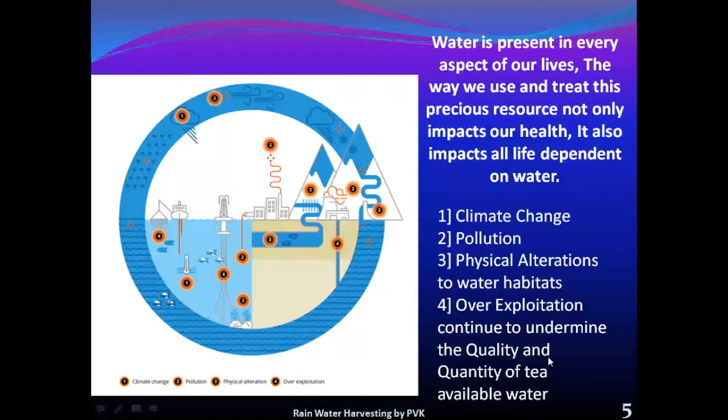This brings us to the water footprint concept. So what is a water footprint? There are different types of water footprints. First is the blue water footprint, used to produce products; this includes water that evaporates from these sources also. We have to understand what the blue water footprint is.

Similarly important is the green water footprint. This is the water from rainwater stored in the soil. We need to understand how much rainwater is available, how much is evaporated, and how we can utilize that. This creates the green water footprint.

Another is the gray water footprint. Gray water refers to polluted water. It refers to the volume of water required to dilute or remove pollutants to acceptable levels according to prescribed norms. When we use and contaminate water, it gets converted into gray water. We have to understand what our gray water footprint is also.

So when we talk about the water footprint, we have to look towards all three areas. Out of these, the green water footprint is now...

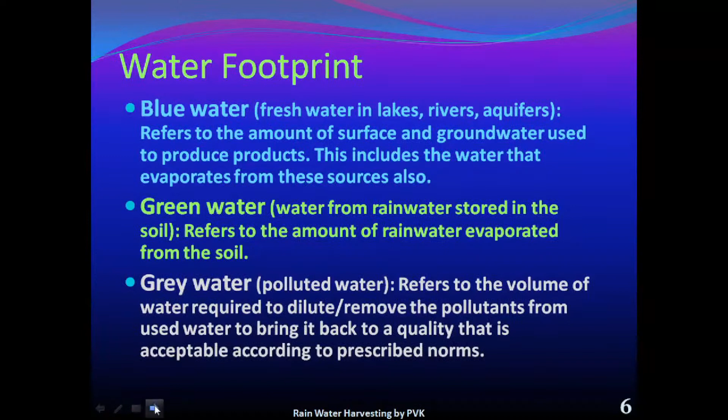As far as India is concerned, the water footprint assessment of India shows that with a population of 1050 million people, our water footprint requirement is 1,100,000 million cubic meters per year. This means a per capita footprint of 3000 liters per day. Remember this is the total water footprint of the Indian people - for one person living in India, we require 3000 liters per day of water, including all physical and other activities. All these three water footprints are covered into this.

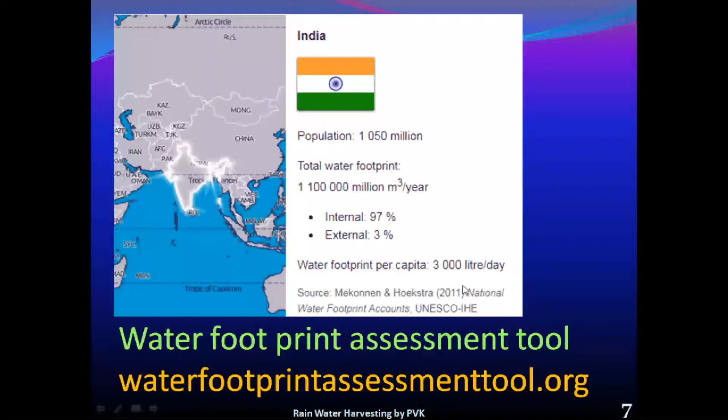One must think about how we can make water available. If you understand the amount of water available on earth, 97.5% of the water is available in the sea, and the remaining 2.5% is available as fresh water. This fresh water, only 2.5%, is what we can use for human consumption.

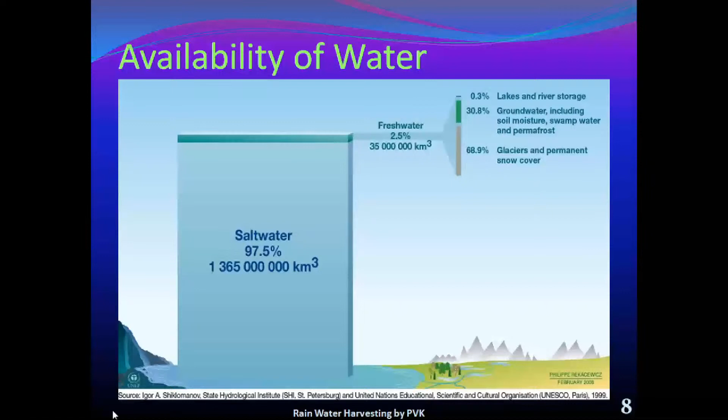Out of this fresh water, we must understand that 70% of the water is present in the ice caps, in the form of polar ice caps. So out of that 2.5%, about 70% is the ice cap.

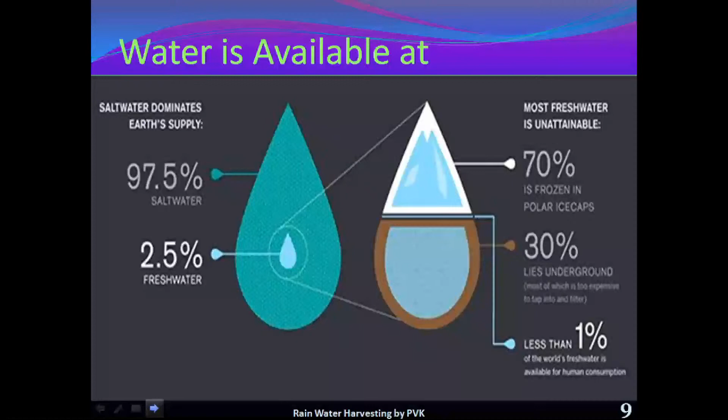30% of water lies underground, and only less than 1% water is available on the surface. Think about the availability of the surface water. Out of this 1% of available surface fresh water, 38% is available in the moisture form in the soil, and 8% is available in the form of moisture in the air.

1% is available in animals and plants, and 1% is available in the river. Remember, this is only a part of this 1%. So out of this 1% of fresh water available on the surface, only 1% is available in the river.

As you know, most of the rivers in India are not perennial now. Out of that, 52% is available in lakes and ponds, where we have constructed dams, and that we are utilizing as fresh water. So if we consider all these counts, total fresh water available on earth, out of that only...

0.007% of the potable drinking water is available. Looking at this factor, one must understand that a very precious element available on earth is water.

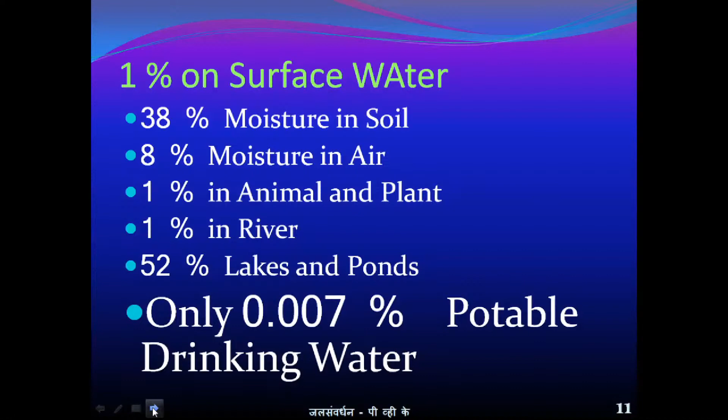So there are various sources of water, as we already know, that we can take water from the river and the lake. We have a municipal water supply at our homes. Then in the rainy season, we get water from the rain.

But all these three sources are limited: rain is only in the rainy season, municipal water is only a restricted supply, and river water is also a limited resource.

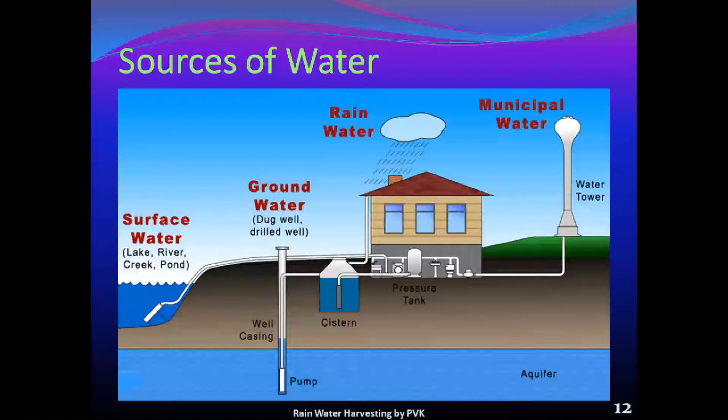So what we are doing now is digging bore wells in the earth, and by pumping from the ground aquifer, we are making groundwater available for our various needs. This activity, in the last 10 years, we have not controlled.

So here one important sentence I want to highlight, which is given by the vice chairman of the World Economic Forum, is that all over the world the economy was getting slowed down, our industries were getting stopped, and now it is everybody's responsibility that we should work extra, work hard, and ensure that we bring our Indian economy again in force.

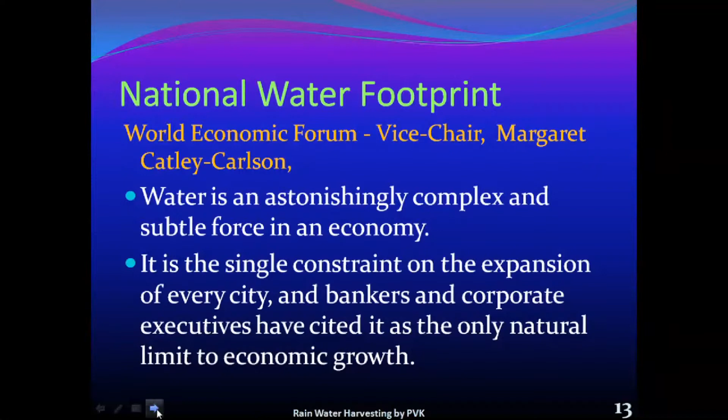And to ensure that, we must understand that you may be thinking we will manufacture or do agriculture, but for all this activity we have to ensure there is availability of water. Only then can we bring energy into our economic system.

So this water is an invisible constraint to the economy that we have to understand.

Therefore, to satisfy the water needs of the construction industry, the water needs of human life, and the water needed for animals and plants, and also importantly to produce food required for all human beings, the water available should be abundant for flourishing agricultural activities.

And for all this we have to ensure there is ample water available. Otherwise, all development in these areas will get restricted. You cannot take agriculture further, we cannot advance human life further, we cannot do more manufacturing, and we cannot have a good construction industry revolution.

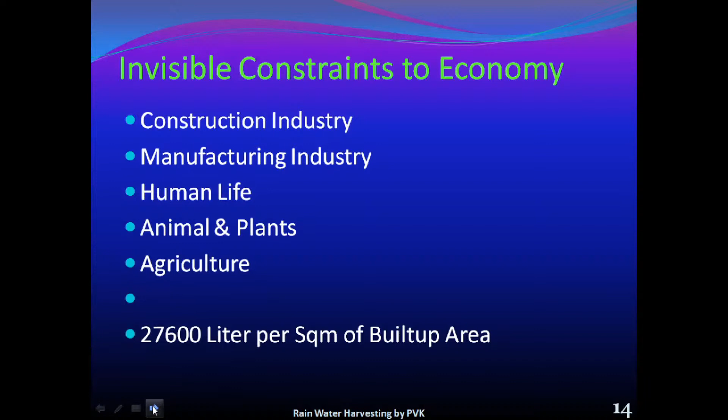So for that purpose, we have to understand that the quantity and quality of water should be sufficiently available for all these activities, and only then can we make our life sustainable.

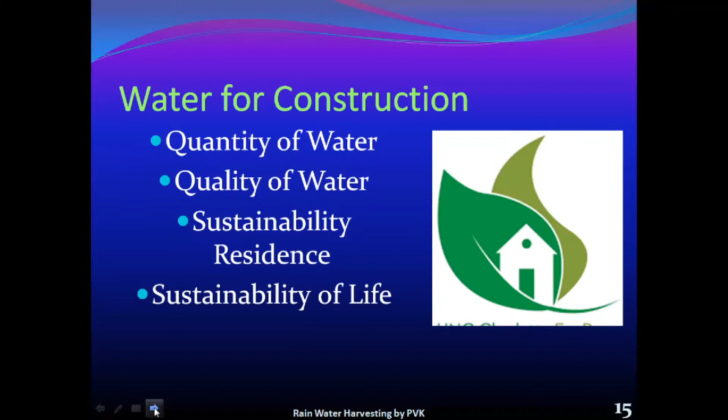So to make sustainable residence and sustainability of life, we have to focus on the availability of water, meaning the quantity of water and the quality of water. Unless we focus on this, we cannot manage all our activities which require water.

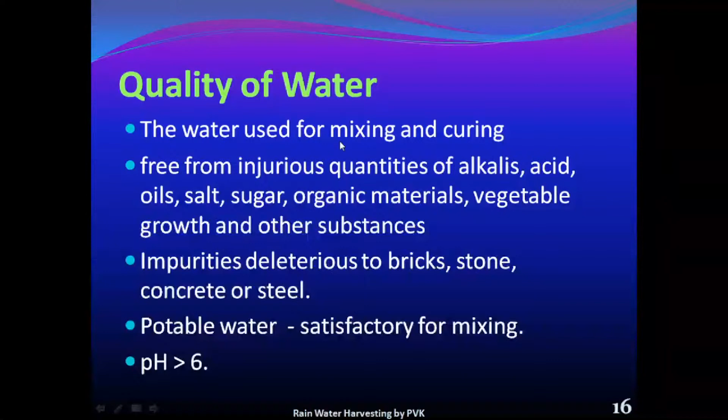From the last 2-3 years, in various parts of India we have been facing a water crisis, and the same is the situation across various countries. One city in South Africa was declared as 'Day Zero'.

So we have to understand that regarding water availability, 25% of people in the world don't have pure water. 40% of people don't have sufficient water; they are always in fear of water scarcity. Out of this, if you think about India, out of the total population of the world, 16% of the population lives in India.

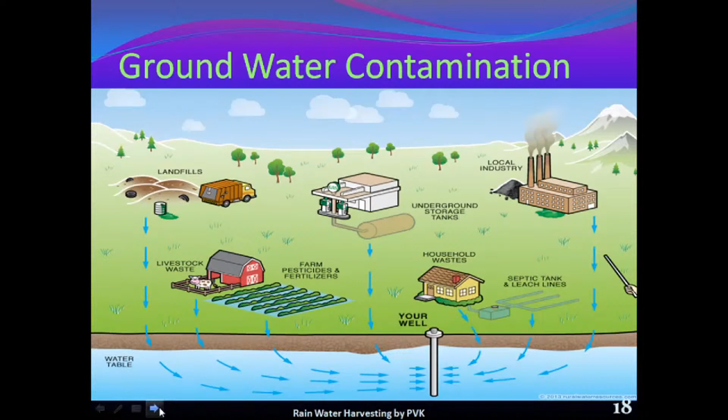So on the surface there is scarcity of water, and whatever water we get through rain percolates through the natural system, also getting contaminated, and is stored into shallow aquifers. But with these shallow aquifers, in the last 10 years we have extracted so much quantity of water from them.

From the last 10 years, people have gone to dig deep bore wells, because at a depth of 100 to 200 feet in the tube well, we are not getting sufficient groundwater. That is the real problem today - on the surface there's limited water, and when we think about groundwater storage from the last 10-20 years, whatever water was available in the shallow aquifer, we have sucked it out, and now shallow aquifers are very dry.

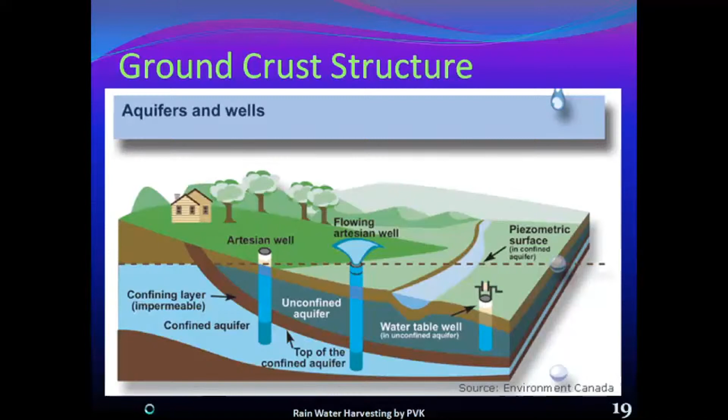With the advancement of technology, we are going deeper and deeper, trying to extract water from deep aquifers. And in the last 6-7 years, the condition has gotten much worse.

Earlier, whatever bore wells and tube wells were there, we were taking water from shallow aquifers. Every year when rain falls, this rainwater percolates and accumulates into these shallow aquifers. But because of this, we have gone into the deep aquifers, and now in the last 10 years, we have made the deep aquifers dry too.

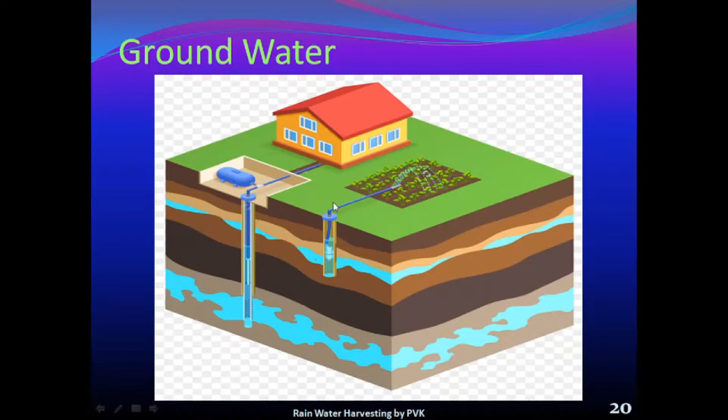Now the condition is there is no water in the shallow aquifer and no water in the deep aquifers either. When rain falls, because of paving blocks, the rate of percolation has decreased significantly. There's also a limited capacity for water to percolate deep into the ground, so water due to percolation only reaches the shallow aquifer, not the deep aquifer, and it takes 15 to 20 years to reach the deep aquifers. That is today's exact problem - we don't have water at the deep aquifers.

Every year our shallow aquifers get replenished with water, we take it out, and in the summer season we think we will get water from the deep aquifer - but from the deep aquifer too, we are now facing scarcity of water.

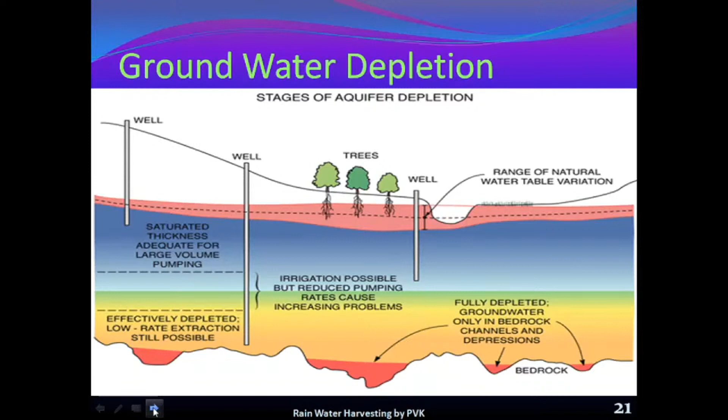To solve this, we have to think about what the solution is. Last year in India the condition was very bad, and because of that the India government started the Jal Shakti ministry.

They have given a 5-point agenda for this. First is water awareness program. Then tree plantation, which we do every season. Then protection of existing water resources, and recycling of grey water. And the last, most important and effective of all, is rainwater harvesting.

With all these, we cannot ensure sufficient water will be available for our future community. But rainwater harvesting is one of the most important and best solutions to make water available for our near future.

For the quality of groundwater available in our deep aquifers, one must go for modern methods of rainwater harvesting. Many people know there are various methods - water collected from the roof gets filtered and then stored in our tanks for use. These methods are known to us.

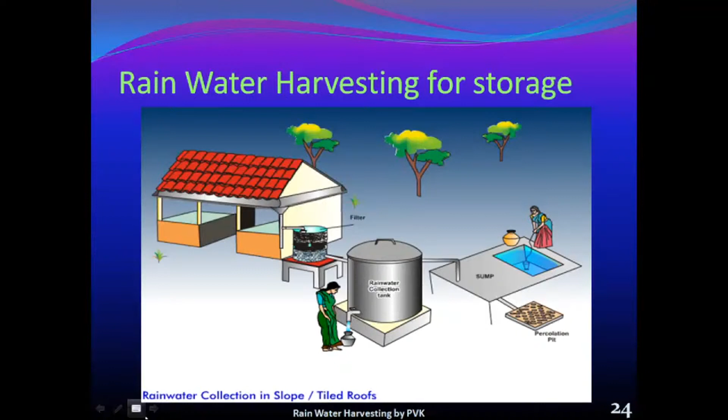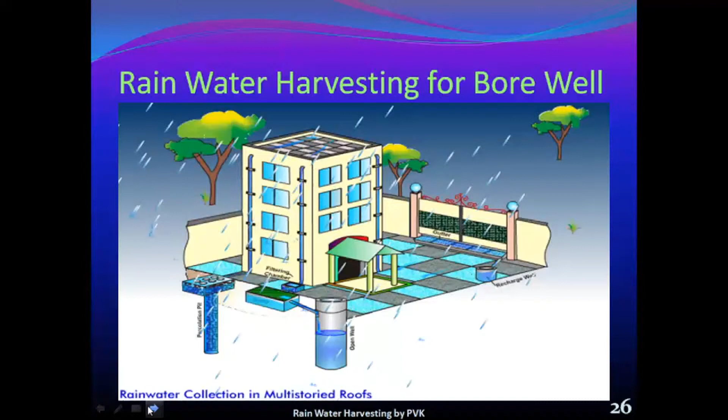We can also filter that water and collect it into a tank so we can use it for gardening and other purposes. We can also make the harvesting go to hand pumps.

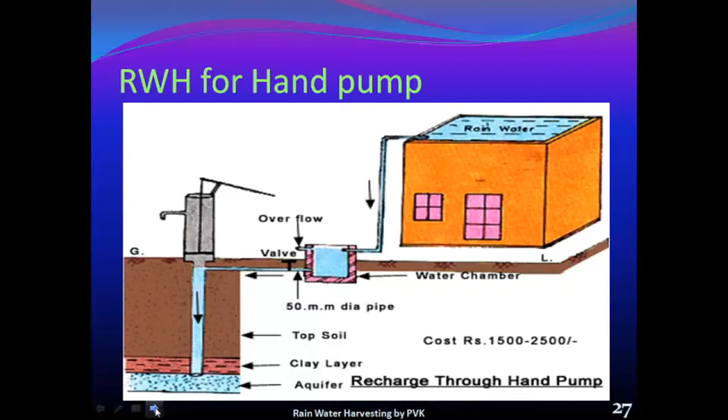But even though this information is available on the internet and various resources, people are not doing the correct procedure for rainwater harvesting. Whatever rainwater harvesting they are doing, there are some technical faults in it.

Therefore we have started this initiative to launch a program for schools and colleges where we highlight the total water conservation program - a 15-point program for schools and colleges.

We must understand exactly what this is. I know people are not exactly aware of the correct way of doing rainwater harvesting. There are some misconceptions - collecting rainwater before contamination and sending it to the open well or bore well after simple filtration, in view of improving the quality and quantity of groundwater, that is called rainwater harvesting.

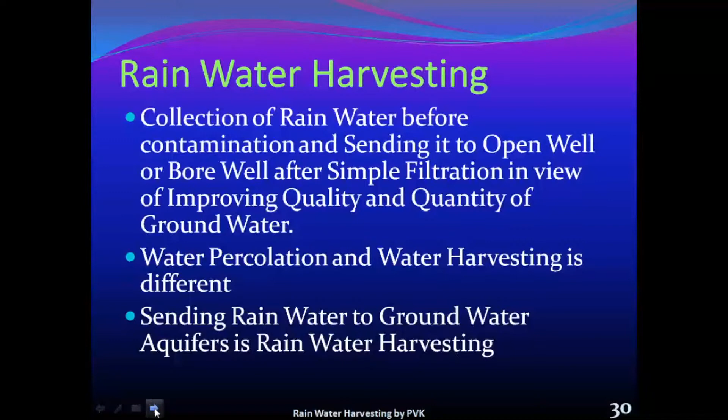To understand this, we will first look at the different elements of the rainwater harvesting system. The first element is providing a mesh at the rainwater pipe on the terrace, so that when rain falls on the terrace and water enters the pipe system, contaminants like leaves of trees and other debris should not enter the pipe system.

Then for rainwater harvesting, we have to provide a rainwater collection pipe system, which we must systematically design. All the rain pipes from the terrace should be connected to each other at the top level, and only one pipe should be taken down. That pipe connects to an inspection chamber for inspection purposes, where we provide a flush valve or diversion valve. In the next presentations you will understand how these valves are arranged and how the inspection chamber is located.

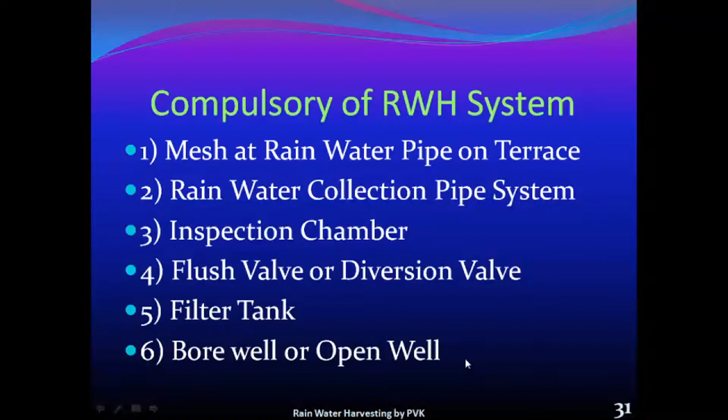Most importantly, we have to collect this rainwater and send it to the filter tank or filter element, and only after filtration should we send it to the bore well or open well, so that pure rainwater directly goes to the deep ground aquifer. Before doing all these activities, we have to understand the exact difference between water percolation and water harvesting.

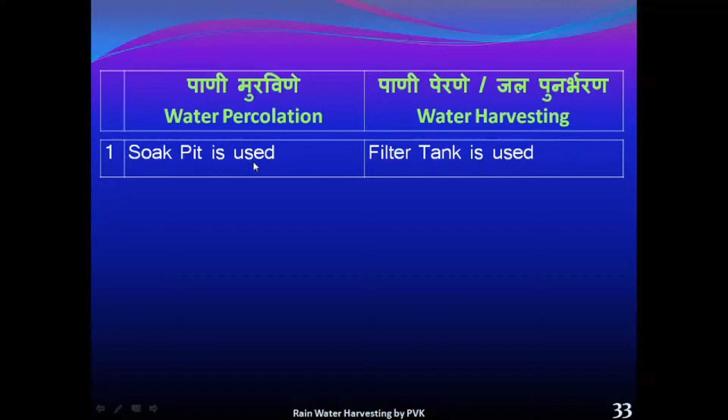So for water percolation, we use the soak pit, and for water harvesting, we use the filter tank. That difference we have to understand. In the next slide, I will show you the figures.

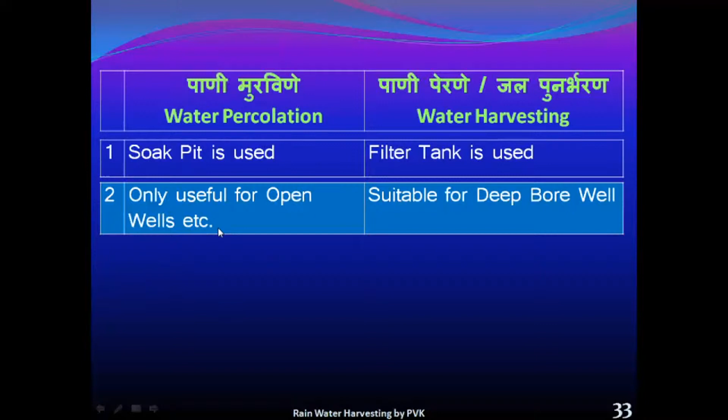This water percolation is useful for the open well only. When we dig and make the excavation, we place some stones into it and send the gray water into that. So that is water percolation exactly, and that water only goes to the well. But to take good quality water to the deep bore well, we have to carry out rainwater harvesting.

Water percolation is meant only for wastewater, gray water, or used water. All this wastewater can be sent to the soak pit. Through that, it gets percolated and goes into the groundwater sources somehow. But in rainwater harvesting, pure rainwater is directly sent to the deep ground aquifers. That is another difference. In water percolation, water percolates to the nearby soil mass only, so it is only useful to the nearby trees and plants.

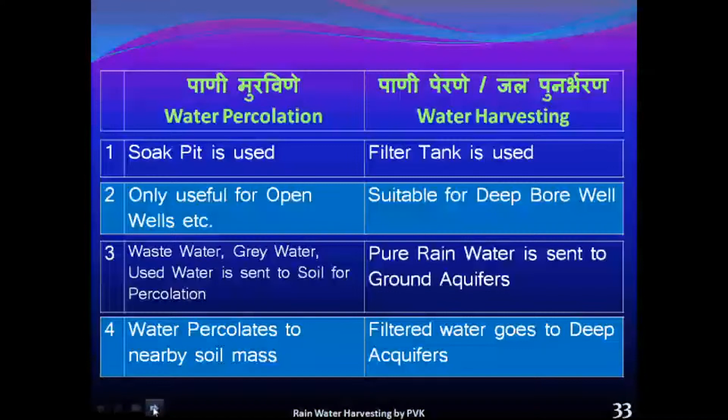But when we do harvesting, the filtered water goes deep to the aquifer, where it gets stored for a long time, and its quality remains good. Therefore we have to understand that water harvesting is more important than water percolation. In water percolation, the water gets absorbed beside the soil mass and the plants only, but here it goes to the deep aquifer.

This percolation of water goes only 30 feet down into the earth. When water is percolated through any percolation pit, it goes down below to 30 feet. But in the summer season, the ground gets hotter, so that water comes out again and evaporates, and the ground surface becomes dry again.

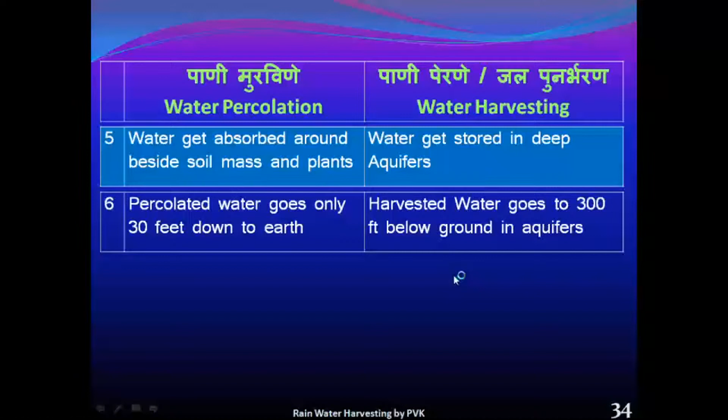But when we send pure rainwater, it goes deep down up to 300 feet below, and we can store it for a long time. Therefore the capacity of absorption and the role of percolation reduces over time. This is only a short term solution, that is water percolation. But rainwater harvesting is the long term solution, where we can ensure the availability of good quality water for a long time.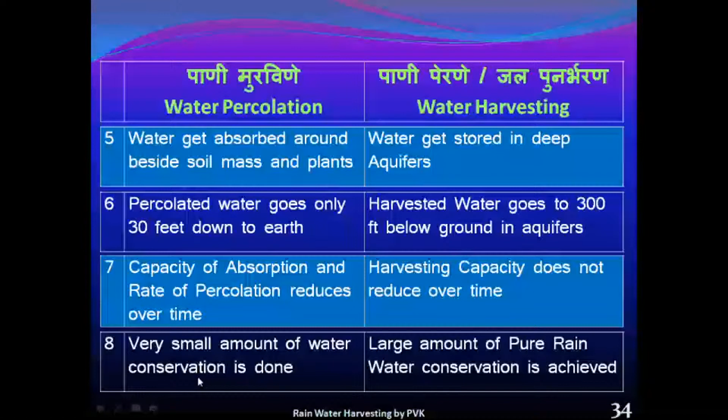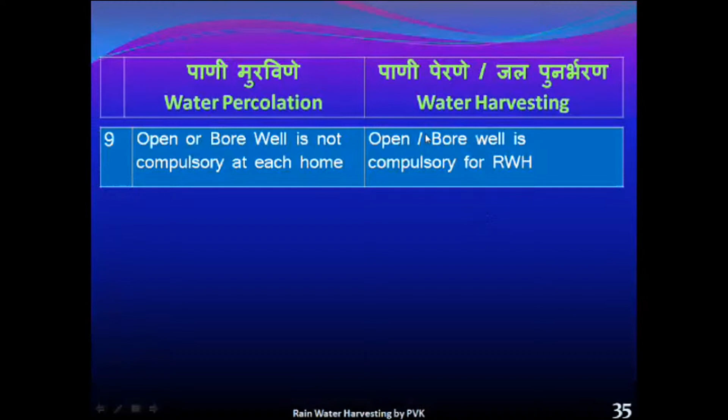With water percolation, only a very small amount of water conservation can be made. But if you want to conserve water properly, when we talk about percolation, that water may be available, but if you require water in deep bore wells, one must go for water harvesting.

The cost of this soak pit or percolation pit is around 3000 to 4000, but very little water is conserved compared to its potential. In case of rainwater harvesting, the cost is only 4000 to 9000 for a 1 BHK or 2 BHK building, but here a good quantity and quality of water gets conserved. So the water conservation potential of rainwater harvesting is very high, and it is very low cost compared to the cost per liter of water.

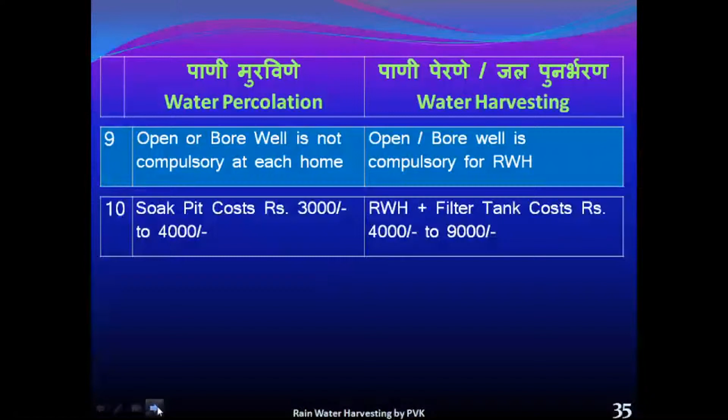In water percolation, once we carry out the percolation pit, no maintenance is required, but it is a very short term solution. In case of rainwater harvesting with a filter tank, it requires around 500 rupees per year in maintenance cost. That is one important thing we have to remember.

The percolation water from the soak pit may contaminate the water in the open well, we have to remember that. If the percolated water gets contaminated, that contaminated water comes into the open well, and the open well water also gets contaminated. But that is not the case with harvested water. The quality of the groundwater also improves, and that is the most important advantage of water harvesting.

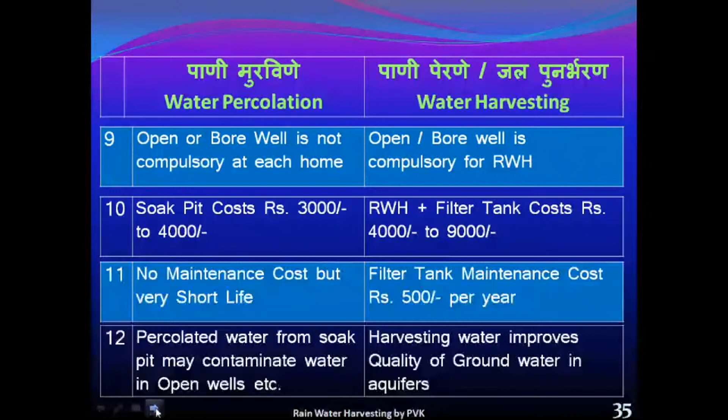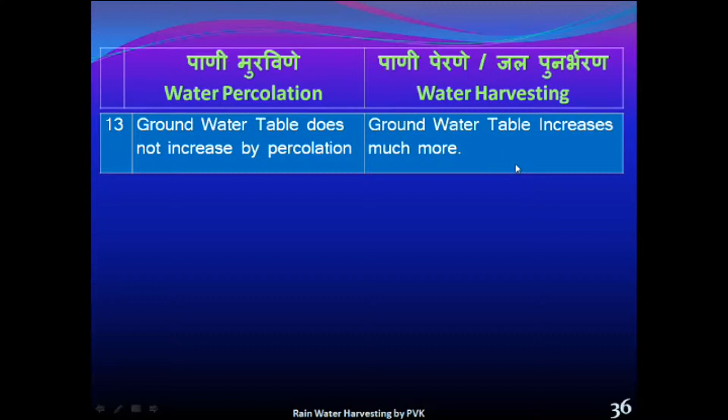So for the groundwater, water percolation is not the solution. The correct solution for ensuring the groundwater table and sufficient water availability in the ground table is only rainwater harvesting. Therefore, we have to remember that the soak pit or percolation pit is only used for wastewater recycling.

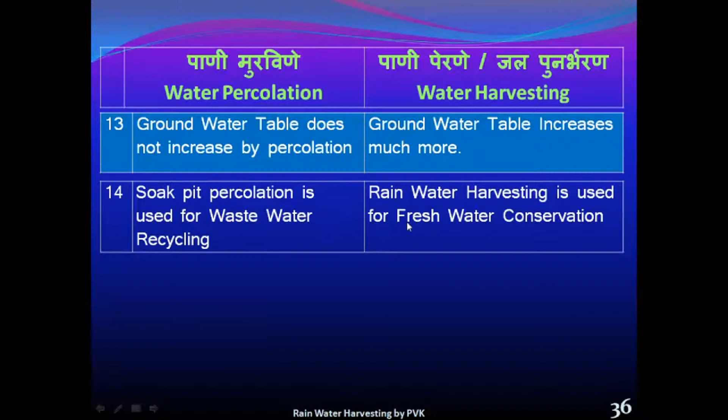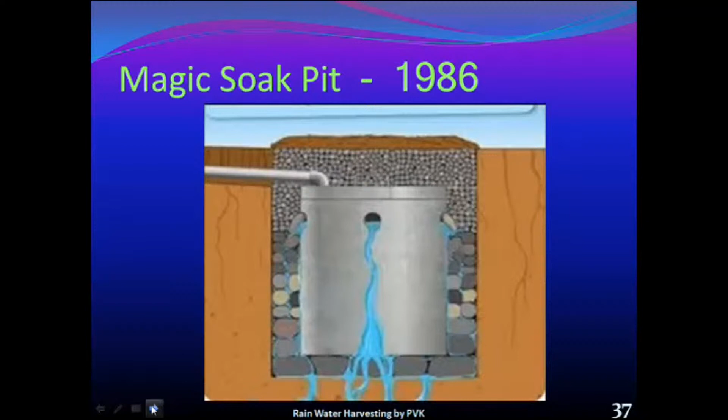Water is in the deep aquifer. That is our exact problem, because most people are dependent on the groundwater available in the aquifer, and they are taking that water through the deep aquifers.

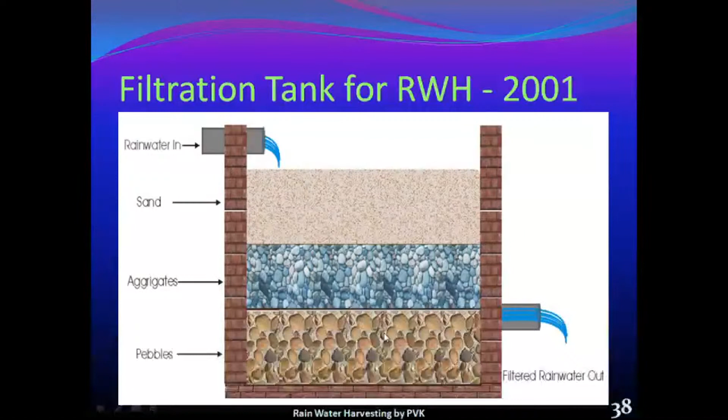This was the situation when we were constructing this type of filter tank in 2001. Even now, the university has constructed this type of filter tank. This is the top view where you can observe the sand, and onto that the water coming from the terrace.

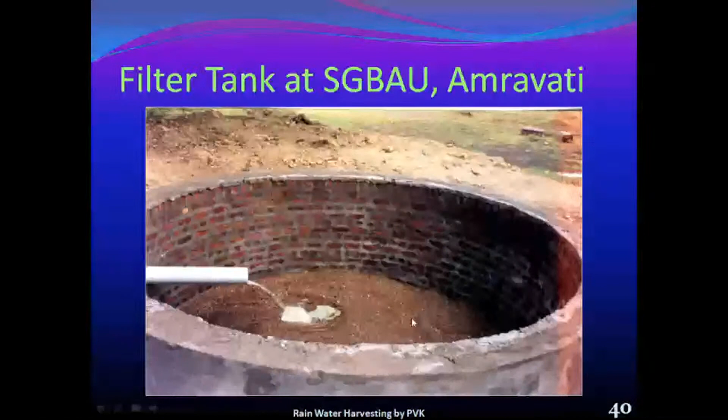These are some of the pictures. This is the bore well casing, and around that we are constructing the filter tank with sand on top, but people were throwing garbage into this tank. So we found a solution and placed this type of mesh on top, so that the sand stays safer and people cannot throw waste into the tank.

But every year this tank requires maintenance. We have to remove the top sand because it gets contaminated with soil, and then we have to refresh it and pour it again. So this type of filter tank requires maintenance.

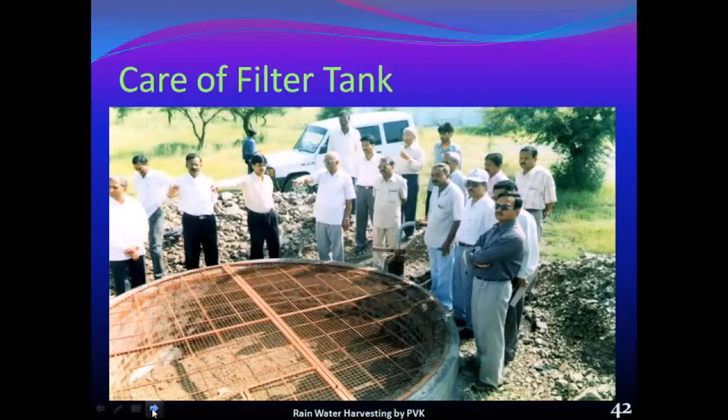When we construct this type of system, we provide a pipe connecting to the well, and that water comes into the well. But over time, as we try to percolate the water, we made a mistake, and the whole purpose of rainwater harvesting got stopped.

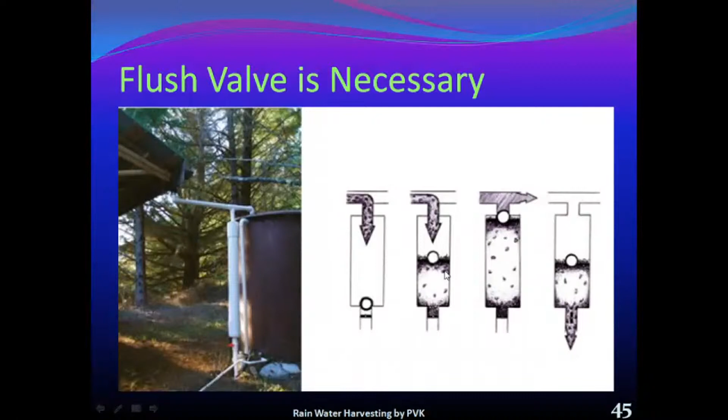Now today we have to understand that to make available a good quantity of fresh water, we have to ensure that we do rainwater harvesting in a systematic way. When using this type of plastic tank, there is no necessity of excavation or making a pit in the ground, and all the filter media is placed inside. This type of filter tank we used in 2008.

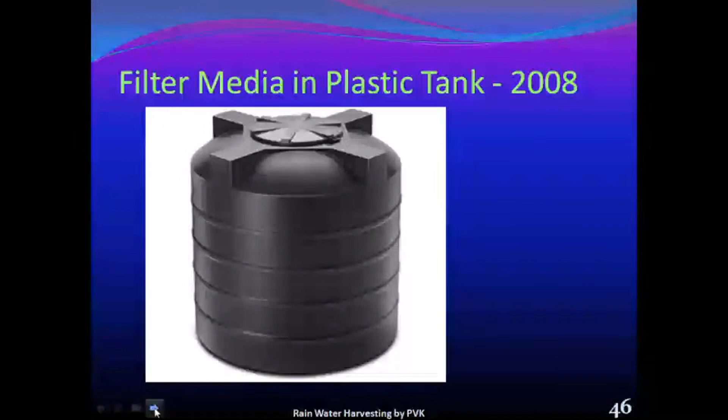But there too, every year we have to clean this filter tank, wash the filter media, and refill it before we can use that filter tank systematically again. So in those days we eliminated this type of filter and tried another type of filtration for the rainwater harvesting.

As shown here, rainwater collected during the rainy season can also be stored in a tank for instant use. This type of pipe connection is provided, with a T-joint, and the pipe is taken to the top of the filter tank. This is the vent provided, and this valve is termed the flush valve.

When the rain starts, we keep the flush valve open, so that the first rainwater coming from the terrace or roof, which is contaminated, automatically flows off here. After 5 to 10 minutes, we close this valve. Then the rainwater coming from the terrace goes to the storage tank and gets stored. Water going into this tank, we have to filter.

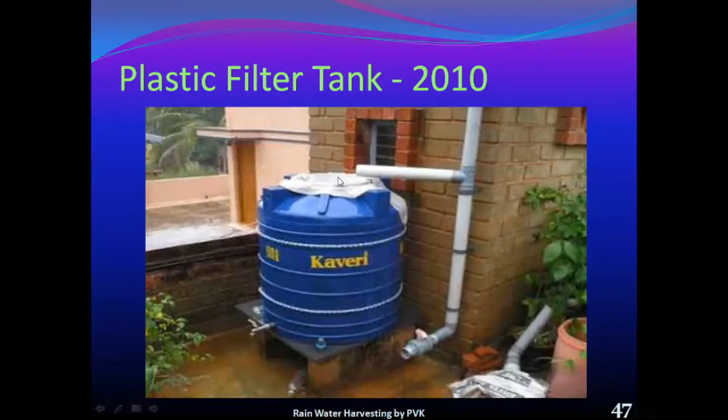If any contaminant is coming from the terrace or the roof, we have to get it separated. For that, this type of system we use. We have a pot, and a 1 inch thick sponge where water coming from the terrace was falling on the aggregate. To place that aggregate, we placed this type of cloth mesh so that we can easily remove the aggregate, wash it, and replace it. For this purpose, this homemade filter we used.

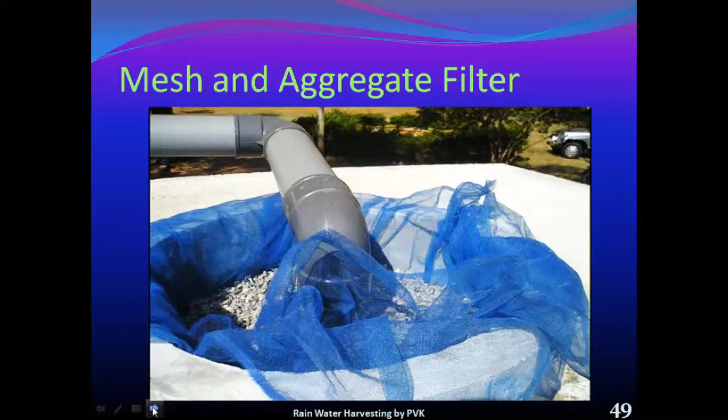Since we were getting maintenance issues, in 2012 we started connecting the terrace water through pipes as shown in this figure, and we can provide this type of ready-made filter on the wall. With this, the modern methods of rainwater harvesting now eliminate the necessity of making a pit in the ground, placing filter media into it, and doing maintenance every year. That is not required at all in these modern methods. You can directly install this ready-made filter on the wall at a height of 4 to 5 feet, and connect the rainwater.

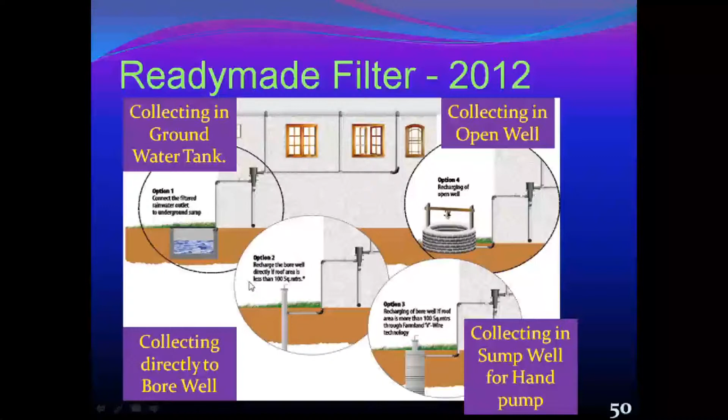So what exactly does the filter do? Whatever garbage, tree leaves, or other contaminants are on the roof come through the pipe system and are not collected here - the contaminants get separated and thrown out. Then this filtered fresh water can be stored in ground tanks or sent to open wells. This way, we started our rainwater harvesting using these modern techniques.

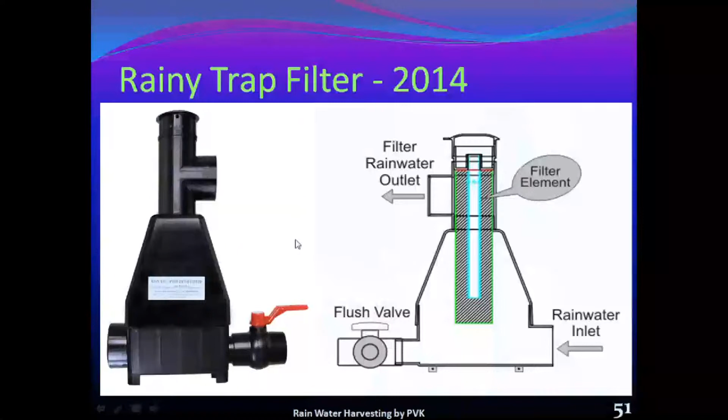In the market, there are different types of systems where rainwater comes in and waste gets separated. Remember that when doing rainwater harvesting, direct water coming from the terrace, roof, or any surface should not be sent directly to the bore well or open well. It must always be filtered. For any rooftop rainwater collected, filtration is an important process. Nowadays you can provide a ready-made filter, and through that, after filtering, send it to the bore well.

This type of system we adopted in 2016. Here is the rainwater pipe coming from the top, and the turbid water was coming in. We provided one filter element at the top of the storage tank, and then you can use that water for instant use. But if you want to direct it further, from that pipe you can connect it directly to the casing of the bore well.

You have to remember to make a hole into the casing of the bore well, and then this filtered water pipe gets connected. The first important thing is don't insert this pipe too far inside the bore well casing, because when you try to remove the pump, it will get obstructed. Insert it only about half inch inside, and provide M-seal packing so that no contaminant can enter the casing, and cover that properly.

This way you make the connection of the fresh filtered water pipe to the casing of the bore well, and then you can send the water. If your cost permits and you have the budget, you can provide a flexible pipe also, which goes down 50 to 100 feet inside the borewell. With a 1.5-inch diameter pipe, you can send that filtered fresh rainwater directly injected into the tube well, to the deep aquifer system we utilized in 2016.

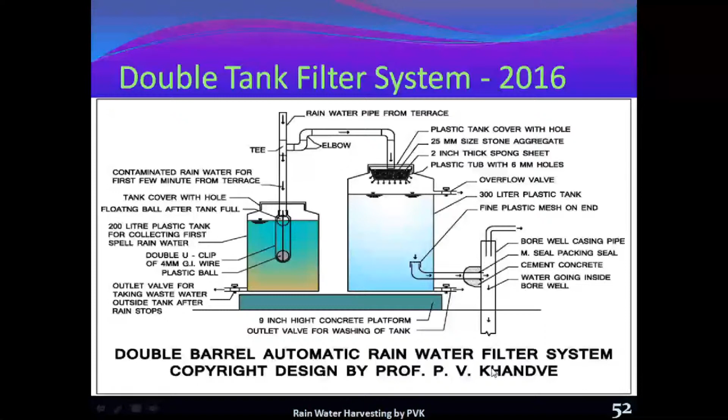But now, beyond that, I got this new filter - we are providing this type of rainy filter for rainwater harvesting. In this type of filter, water coming from the rain enters tangentially, creating a vortex. A central hole is created, and if there are leaves or garbage, the waste comes down through this filter where a stainless steel element is provided. The water gets filtered into the outer chamber, and from this outer chamber we get fresh water, which we then directly inject into the tube well or bore well.

Remember, this type of modern filter is now available in some island countries, where rainwater harvesting is compulsory. If they are not injecting rainwater into the aquifer, the aquifer water gets contaminated and salty. Because of this rainwater filter, they are taking this filter from India.

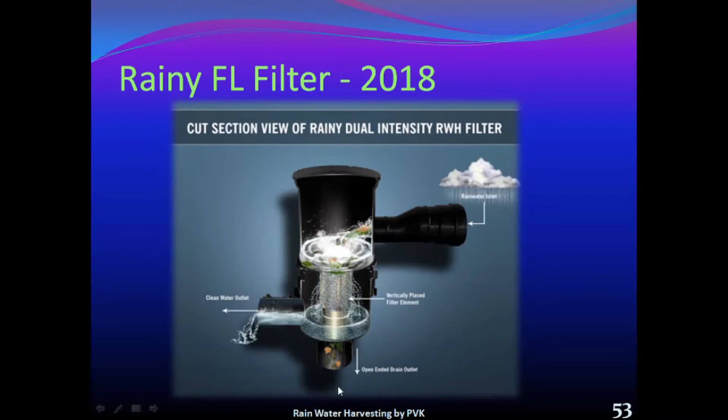In this filter, only 10% of the water is used to clean the filter element and take the wastage directly out, while the remaining 90% comes through the pipe from the terrace. From the bottom, the drain outlet lets out the 10% wastage water. The fresh water valve can always be kept open, with no need to control it over time, and this water goes directly to the deep borewell.

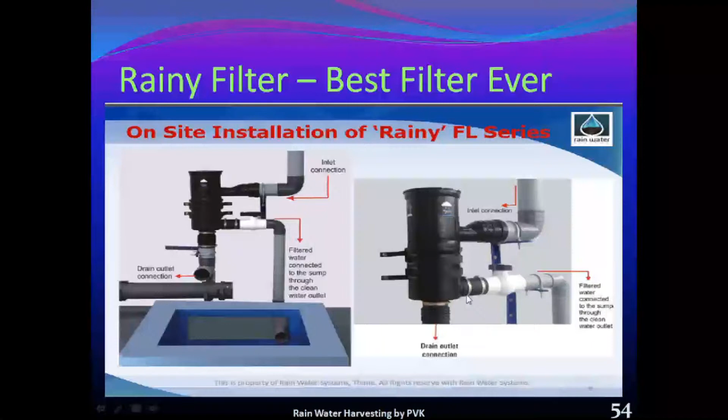By using this type of modern filter, one can carry out rainwater harvesting collection systematically. The water is taken to the filter, and then the filtered water is directly taken to the hand pump. In these types of schools, an abundant amount of water is available at the hand pump even in the summer season.

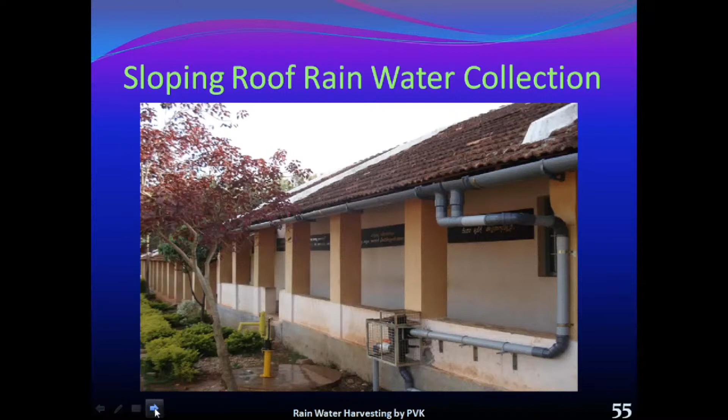For flat schemes or buildings, you can also collect all the terrace water and provide this type of filter. These filters come in different capacities.

For a 1000 square foot area, the basic filter FL100 is available, and FL200 for a 2000 square foot area, and so on for larger areas.

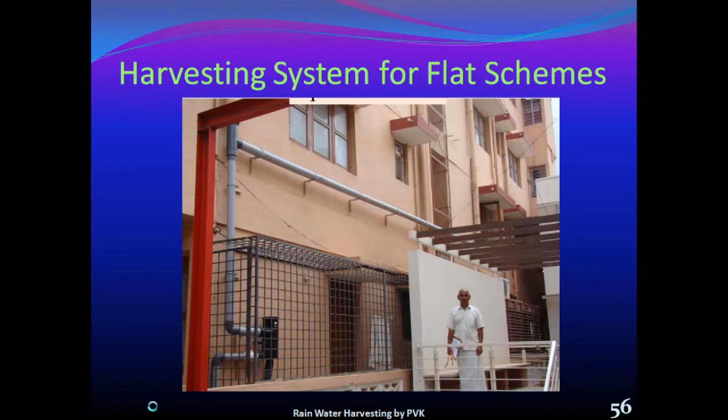Or you can provide multiple filters. For a terrace of 1000 square feet, you can collect 1 lakh liters of water, which is pure, distilled water. You can store it in the aquifers available below the ground.

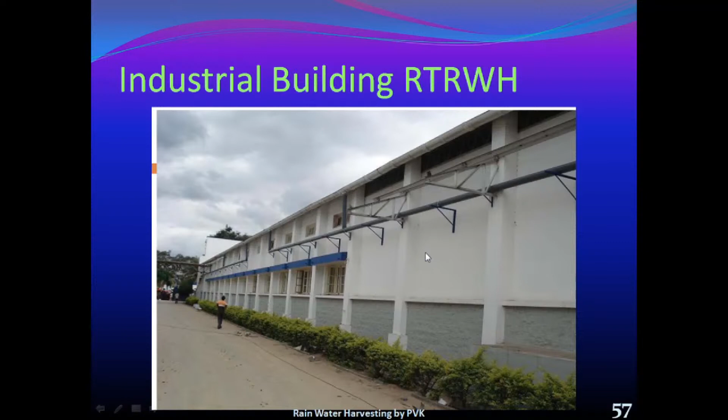So we don't have to worry that our borewell will overflow. Only in 2% of cases does this happen, when some typical type of geography is present. In most cases, about 95%, the borewell never overflows, and all the rainwater collected from the industrial shed or terrace can be sent to the deep aquifers.

In the rainy season, you can also provide water tanks where you first collect water for instant use, and then the overflow from this tank can be sent to the borewell for water harvesting. With this technique, you can provide different storage systems for collection on the ground.

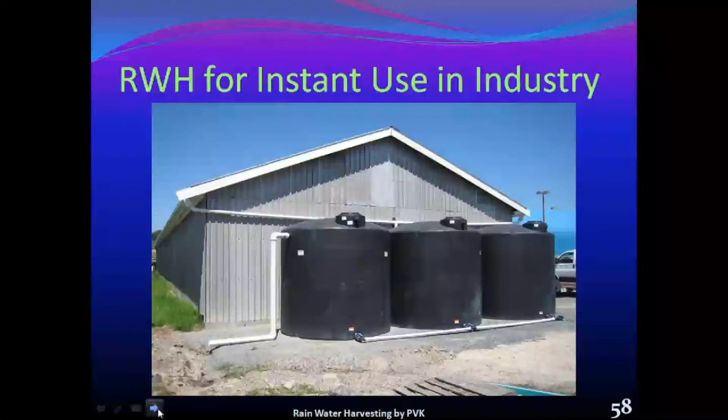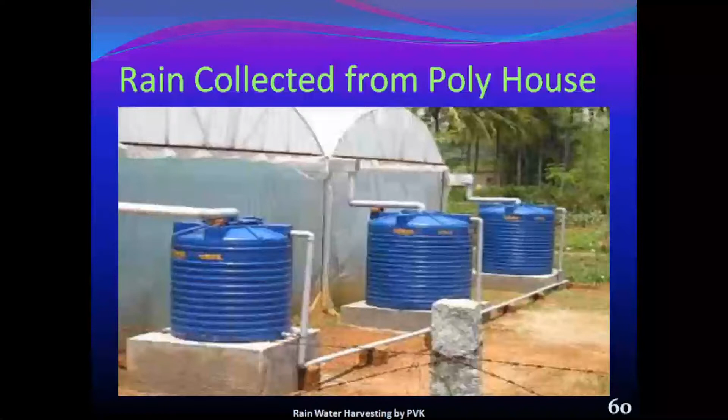But one must remember that natural ground storage, the deep aquifers available below the ground, are the greatest storage to save an abundant quantity of fresh rainwater, and we can facilitate that by doing rainwater harvesting in modern ways.

So for the household, for the terrace, for the city area, you can provide this type of modern rainwater harvesting even in the summer season.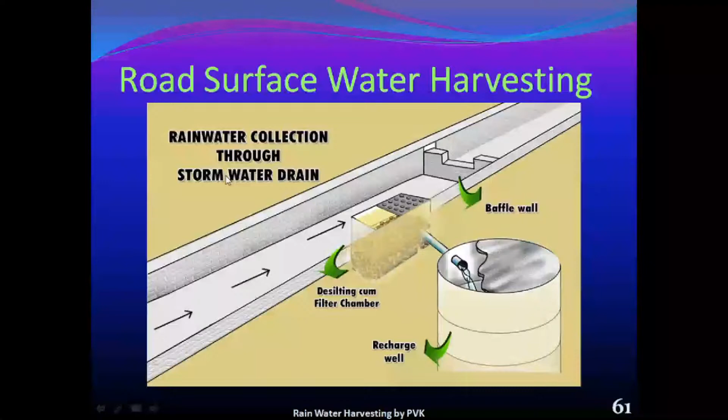There are some other techniques also that I will not discuss in detail, but in this type you can also collect water from the farm surface and road surface. We can filter it, and we can also harvest the surface water falling on farmland or water that gets contaminated.

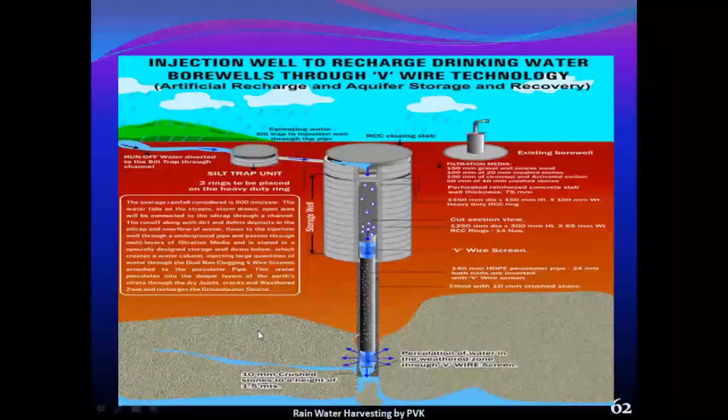That water can also be treated, because when rainwater falls on the ground, it gets contaminated, and if this contaminated water is sent to the groundwater, microbiological organisms grow there, contaminating the groundwater with microorganisms. Therefore, you have to provide a systematic filtration system for the rainwater, and only after ensuring that can we get a good quantity of rainwater available for our use.